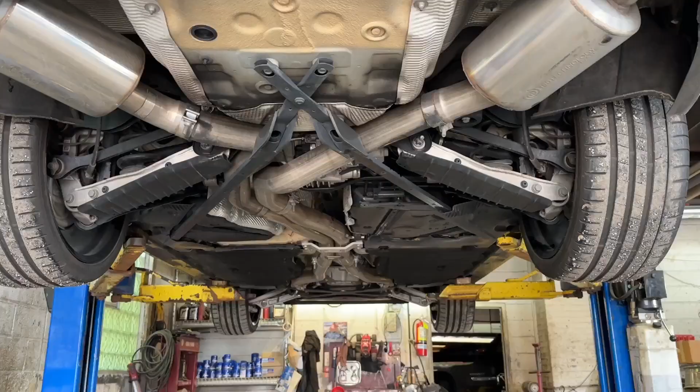All right guys, it's up in the air. He's gonna put it in drive. There we go. Front wheels are spinning, drive shaft spinning, but not the back wheels. Yeah, that's definitely probably the rear diff that blew. Alright, it's in drive. This one's spinning a little bit now, but not this one. So we're definitely gonna take a look at the diff.

Alright guys, so I got her back on the road. She is all fixed, driven, no malfunctions, no codes. And I found out what happened with the original diff.

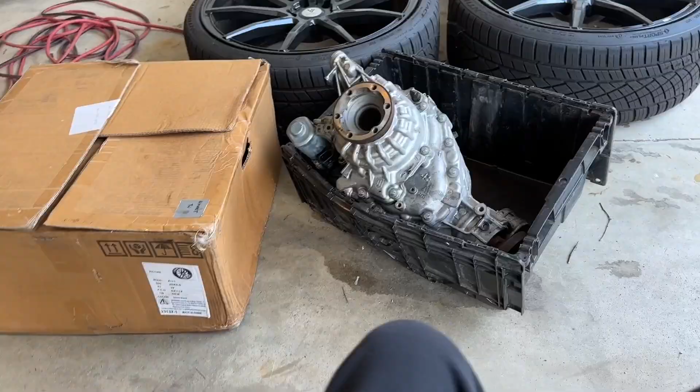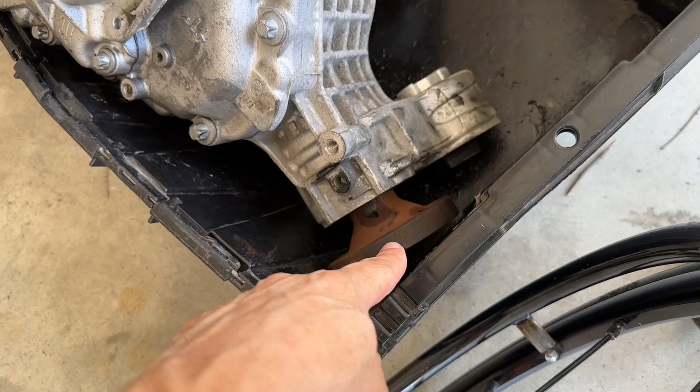So I have it positioned uniquely right now. Obviously this is the rear differential, if you guys didn't watch the beginning of the video. And the drive shaft would input the power here and split the power out the back. So like I said, this is the rear diff. The drive shaft comes in here and then it splits out to the wheels here. And as you saw in the video, the rear wheels weren't spinning. Like I said, the car wasn't moving. This would be the bottom and it would come in from this way. So this would be the driver's side wheel. None of these, this, or this should come out. This is one nice sealed unit.

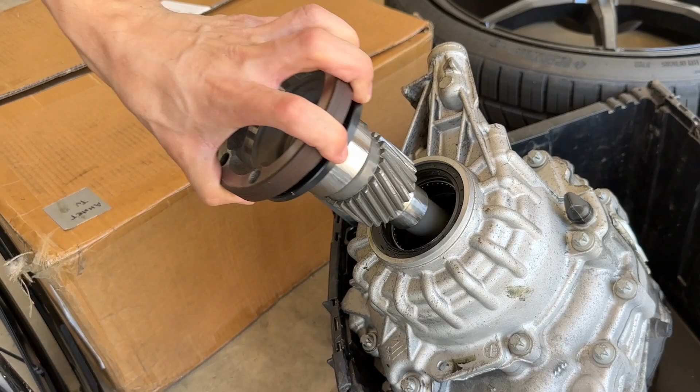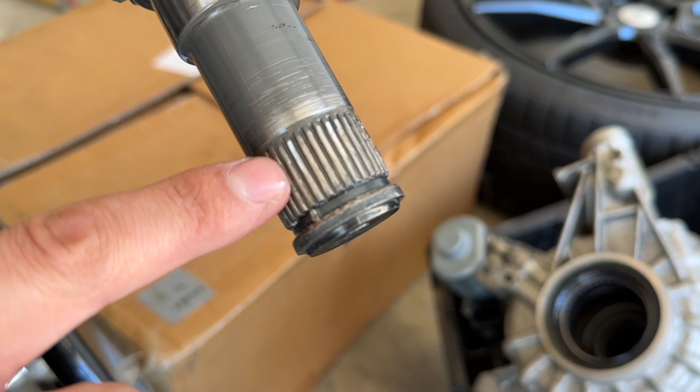And this is what we found. This comes right out. The snap ring that goes around here is obviously gone. It's in there, you can hear it. And I think the sprocket or the gear that attaches to here is in pieces in there. And you can also see that this got a lot of damage from the slip and possible wheel hop. It wasn't wheel hopping too bad, but it did slip and grip, and it was probably spinning all the wheels at different speeds. And obviously the rear differential went crazy and this broke.

But all right guys, I'm going to get this one rebuilt and possibly beefed up if I can.

All right guys, fast forward to the future a little bit. I didn't want to leave you guys hanging. As you can see, of course, my car is good to go. Like I said, I got it fixed and here's the old differential. But I didn't want to leave you guys hanging as far as the rebuild or the beefier upgrade or anything.

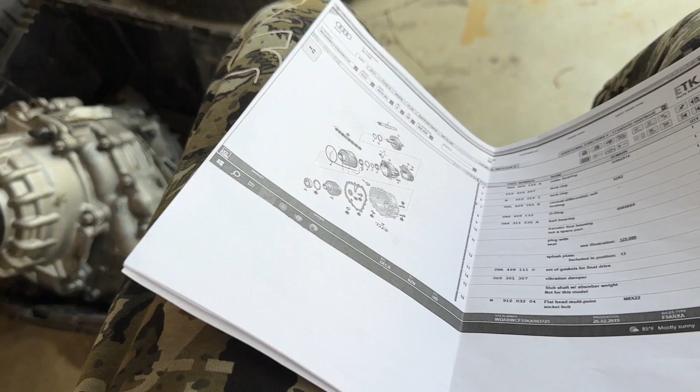So I called several transmission shops locally. They said they won't touch it. So then I finally went to Audi with the literal video that you're watching. If you've watched it up to this point, I showed him the video where I took that out. And the guy took my phone in the back, went to the mechanic and showed him that. And yeah, they won't touch it.

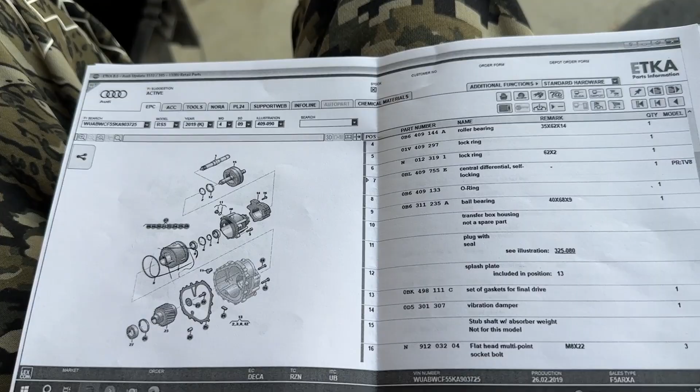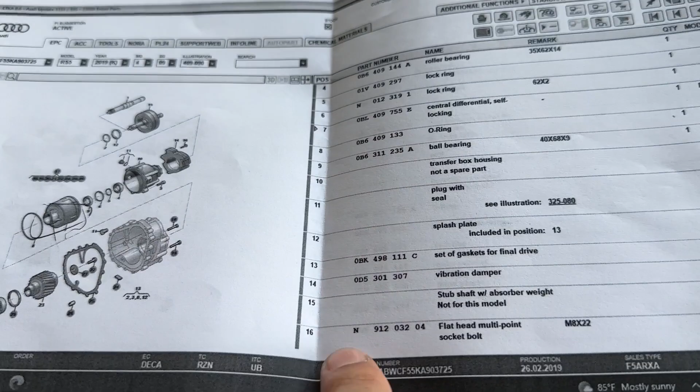And here's several reasons. So I got several printouts. So one thing that I don't like is several of these internal parts. I got 3 sheets here and then a blow up of the part I took out. So on this sheet, specifically part 23 and 27, this gear and this bearing, you cannot get those. They are not available separately. We're not scrolled down to that number, but it literally says not sold separately, period.

So a lot of these parts you can't get separately. And then also a lot of these parts, you got to get in whole sets, like all these parts you got to get together if you want to get any one of those. But like I said, they're not all available.

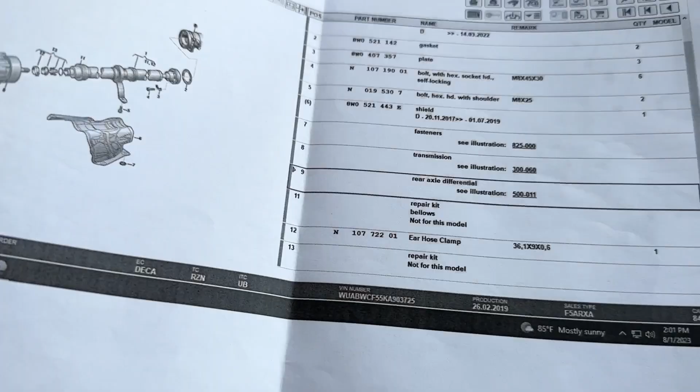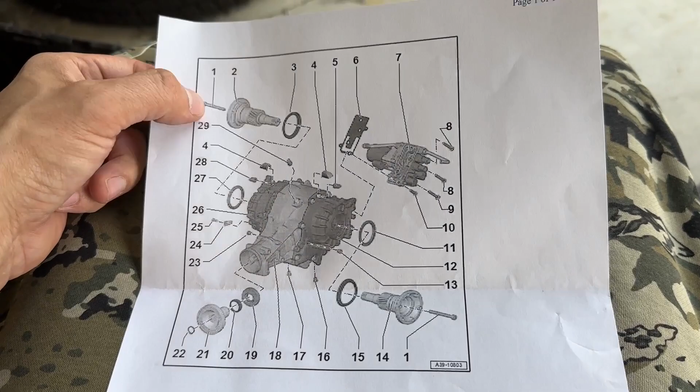Okay, so then the service advisor comes back from talking to the mechanic with this. They already showed him the video. The mechanic's questioning where this bolt is. It's actually still in there. It's a Allen cap screw, but here, let me pull it out real quick. It's right there. It's still in there. Let's see if we can see. Yeah, see the cap screw, and it's still in there. So I really don't know the purpose of that.

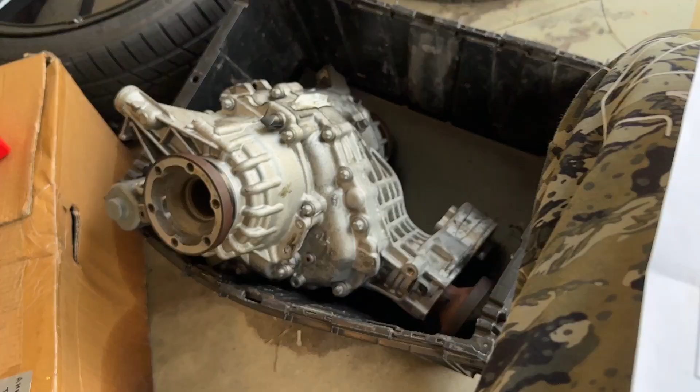But yeah, long story short, they won't touch it. This is just a paperweight, scrap weight. They won't rebuild it. It's just something like if they got it, they would replace it. They tell the customer he needs a whole new unit.

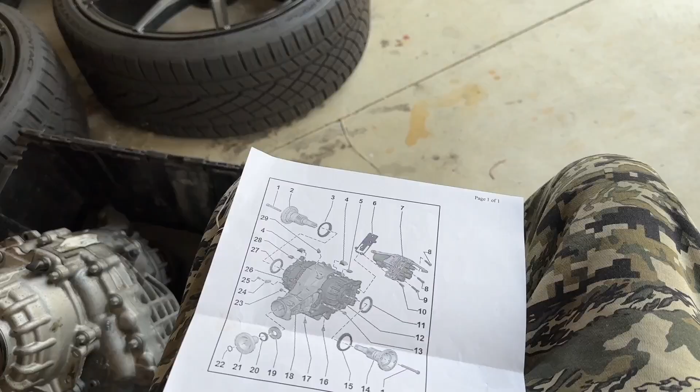All right, I hope this video helped you guys out. I mean, ultimately, I'm gonna get a workbench and I'm gonna get this thing up on it and I'm gonna take it apart and rebuild it myself.